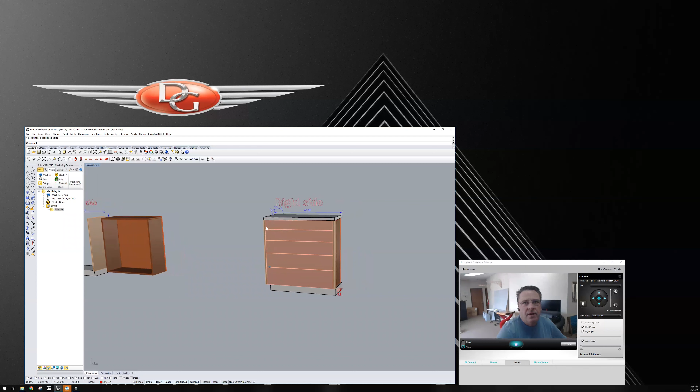Hey guys, so what we're going to do in this video is we're going to show the process of what we're doing to generate components for tool pathing to cut on the CNC.

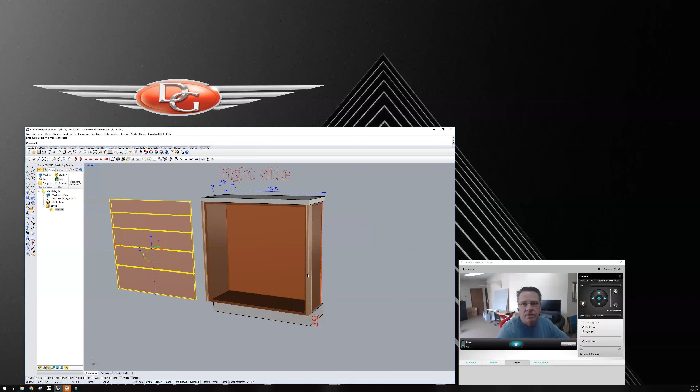So here you can see a simple cabinet. We've got drawer fronts. We've got a filler here because this lands against a wall, so that's just a 3/4 inch filler for scribe. Then over here on this side we have a panel end. There's the carcass, toe kick area, and the countertop.

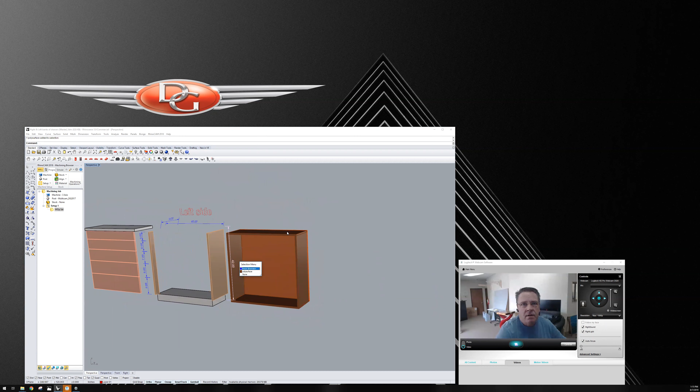And in this application we actually have two cabinets, a right and a left. And the left side I've already exploded, so we have the carcass, we have the back, sides, top and bottom. Because this is going to get a bank of drawers, we're not going to put any shelf pinholes in this. It's just going to be an open carcass.

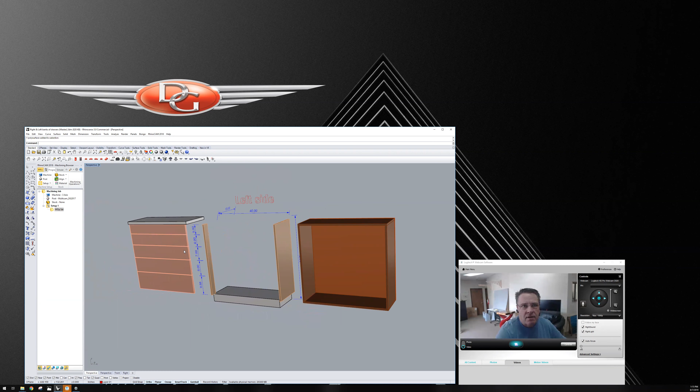We didn't draw the drawer boxes in there, but we will take this inside dimension, subtract our 5/8, 5/16 each side for our drawer boxes, and this is the size of our drawer fronts: 5, 6, 7, 8, and 9 and 7/8. So we'll make the drawer boxes for those appropriate. And so there's our exploded cabinet, there's the cabinet put together, so we're going to have two of these guys.

What we've done is we've taken all of the components. So we have top, bottom, and the sides for these two cabinets, and then these two lighter brown, these are the backs. So we've arrayed those out onto four sheets. We're also going to cut, you can see these long strips here. These are the toe kicks. So we'll pre-cut those so that we don't have to rip those on the table saw because we've got the room in those sheets. So what we want to do is we want to go to our top view here.

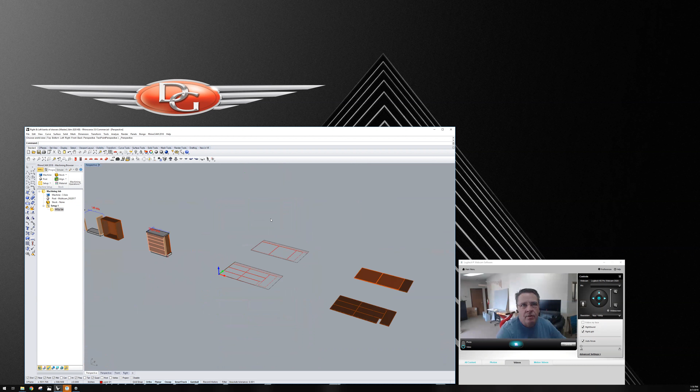So now, and this is something I'll bring up every once in a while, we're going to talk about what is called the C-plane, construction plane. And you can see this, the blue, the green, and the red. This is the XYZ home. So typically, when we do our 4x8 sheets, this is 96 inches by 48. So this is our home one on the CNC.

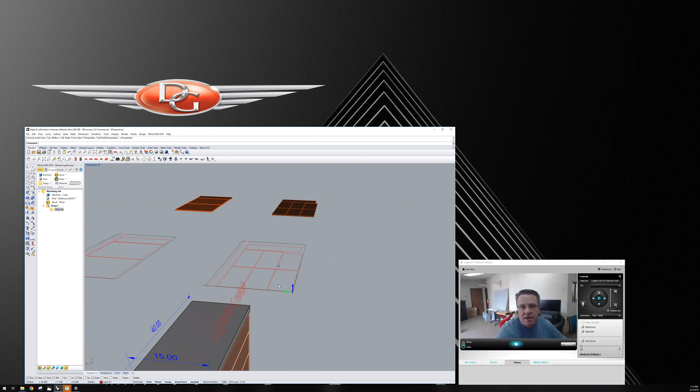So as we walk over to the CNC where we started up, this area here, this is where the controller is. So our table's actually 5 feet wide by 10 feet long, obviously bigger than a 4x8 sheet. So these are the parts arrayed out in a 4x8 sheet. And what we want to do is, when we're drawing stuff, these guys could be above the C-plane. See how they're up like that?

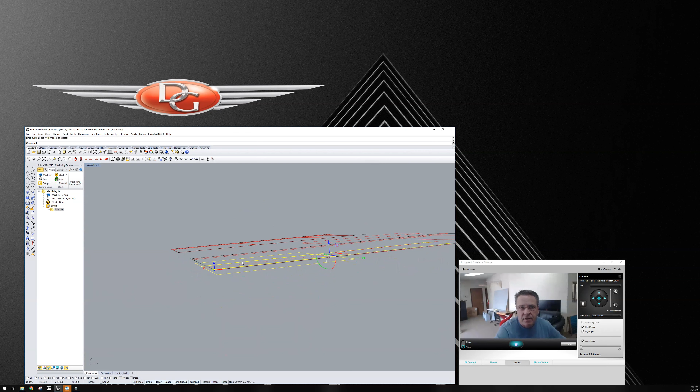And if you were to tool path this, it would cut these parts above the C-plane. And the C-plane is when we set our surface off the top of the plywood. We set our surfacing block on there, and we tell the machine where the top of the plywood is. Well, it's going to set that surface, but then if we're doing tool pathing with the parts up here, or even worse, if these guys were down there below the C-plane, the machine is going to cut to this level.

So when we array out all of our parts, let's go back to top-down view. Those parts that I had highlighted, those are below the C-plane. So if we go back to the top view, we want to give a command up here in the command button. We want to go project. So you see here, project to C-plane. So we hit project to C-plane, select objects. So I'm going to select all of these guys, because those are all of my curves. And then I hit enter.

And you see that the choice here, it gives me delete input objects. So if I hit no, it's going to keep those guys that were below, but then it's also going to project those to the C-plane. I don't want to do that. I want to have everything just projected to the C-plane, and then anything that wasn't at the C-plane, I want to throw it away. So hit yes.

So now when I go back, go back to the perspective view, you can see everything is back there. If I hit the back button here, you can see there they are. That was before the command. If I hit the redo button, it puts it back at the C-plane. So everything's at the C-plane height here.

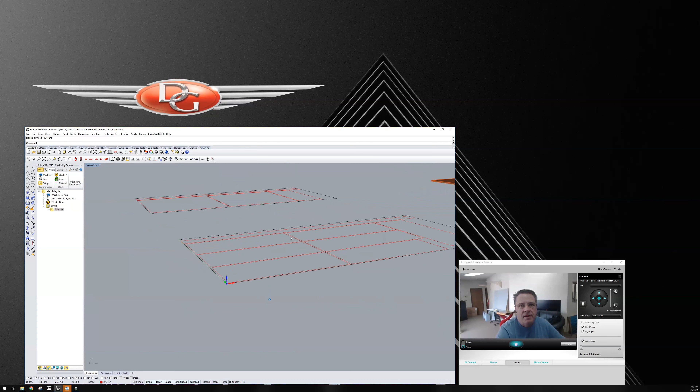So this is our first sheet right here. These are components that we're going to cut for those cabinets. And this is something else I want to show you real quick. These lines are the perimeter of these sheets over here. The way that we do that is we go to the side view here and see these guys. There's the lighter brown and the dark brown.

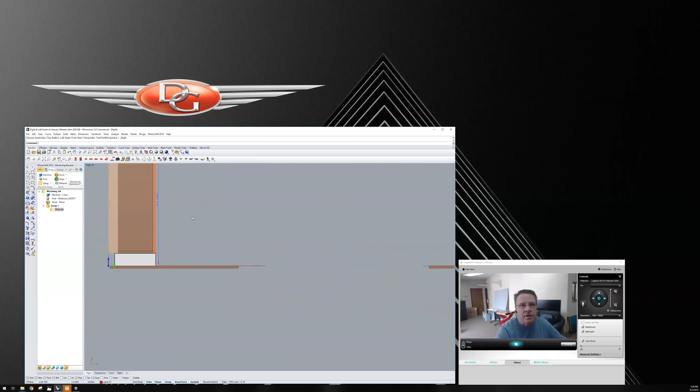So let's go to a view where you can see both of those guys. Well, you can kind of see them through the other direction. See here, that's the large back that's back behind there. But these are the pieces laid out nice and flat. And so what I want to show is the way that we generate this.

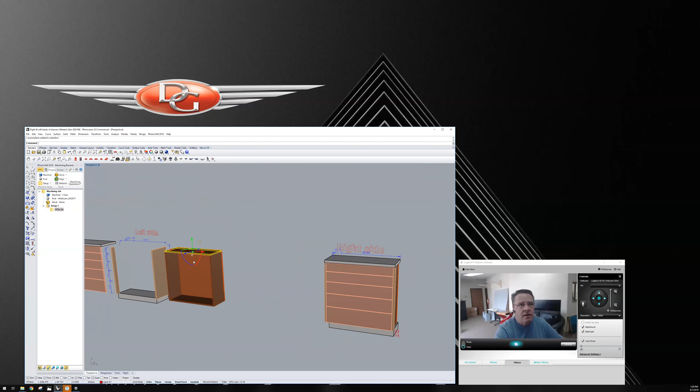So when we bring in our models, let's take a look at this again. We have all of these components over here: top, back, bottom, right, left. We've taken all those for these two cabinets, copied them, brought them over here, and laid them flat. They were all at different heights, but I brought them down so they're all at the same level.

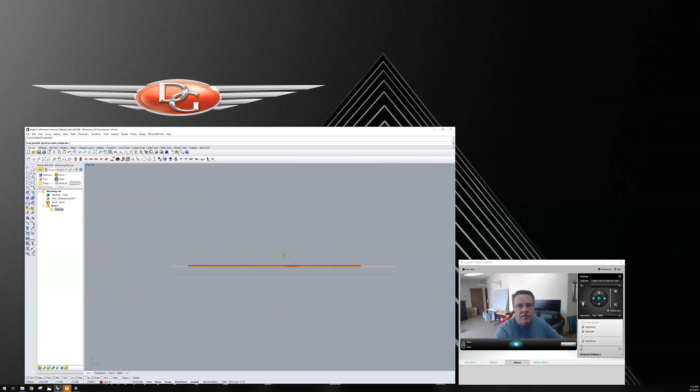And then what I'm going to do here is draw a line. So go up here to the polyline, left click, and I'm just going to draw a line across here. And I'm going to take this line and bring it up so that it's intersecting, going through all of those parts. And turn that off.

So now, see this icon over here, it says Project Curves. I'm going to left click on that, and it asks me to select curves or points to project. So I'm going to drag across that. If I drag from the right side to the left, anything that my square touches is going to highlight. Let me undo that. Let's go back to that command.

So I'm going to go back to Project Curves, and it's asking me to select curves and points to project. If I drag this box from this side, I haven't highlighted the whole thing, so it's not going to select it. But if I come from the right to the left, anything that touches it is going to highlight. This curve is going to be projected through all of those parts. Press enter when done. So hit enter.

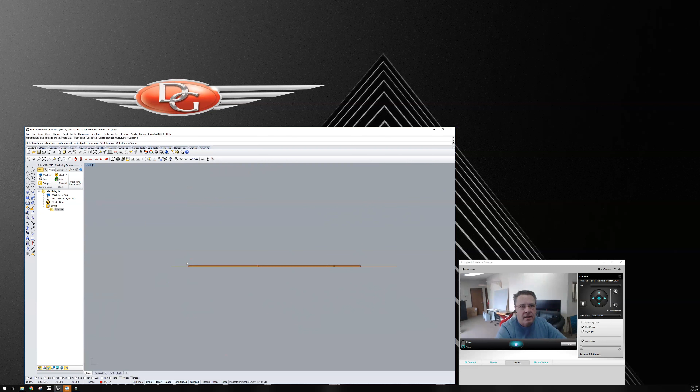Oops, let's do that again. Select curves to project, hit enter, and now it's asking me to select surfaces, polysurfaces and meshes to project onto. So I can just box over all of that stuff, and it highlights everything. Then I hit enter again, and let's look in perspective. Everything that line goes through, the perimeter of all of those parts is now highlighted.

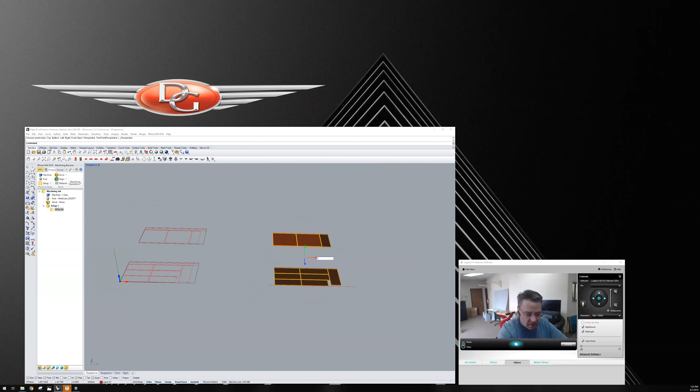So just to show you, I'm going to move it negative 100. These are the same components that I put over in this spot here, because I just did that prior. So we don't need these, we already have them. But that's how we do that.

Let me delete that. That's how we get the perimeter of all of these parts: we use Project Curves, project the line through all of those parts, and then move those over. I actually arrayed these out so they fit onto 4x8s as solid pieces before I did this. But you can also take the curves and just array those out in the 4x8 sheet.

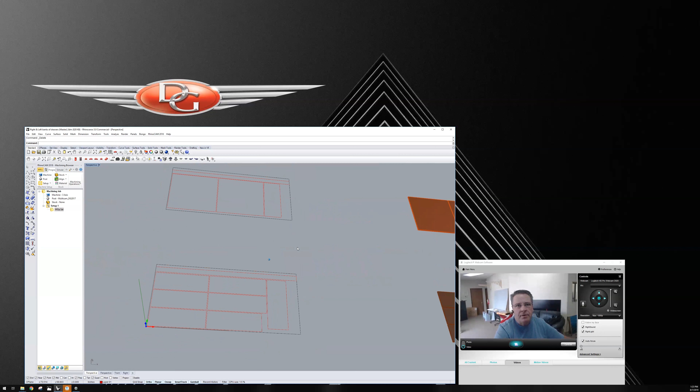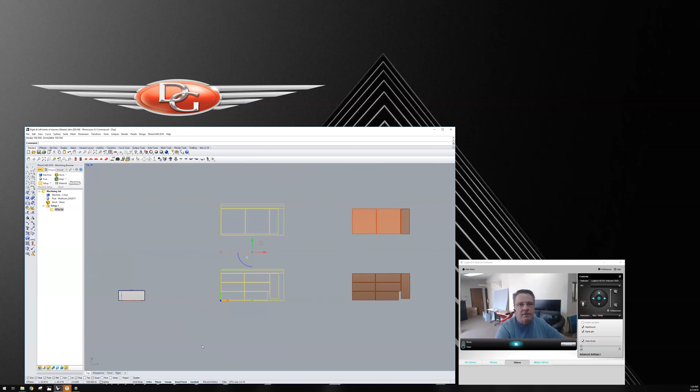So now what I want to do is this sheet here. What I typically do is I move stuff in increments of 100 inches. So these guys here, if I hover over those, I have my quick buttons set up where the up arrow, down arrow, right and left move in 100-inch increments. So if I just hit the up arrow, it moved everything 100 inches up. Come back down, so my part is in that same spot.

So now these are the perimeters of the parts that I want to cut. So what I'm going to do here is go up to machine operations, and I'm going to go to create machining operations. So it's a MOPS. Actually, I already had one going there, so let me cut that and get rid of that. So I have a method of operation set. So go back up here and hit 2.5 axis. Click on that. So these are my choices.

Typically, we're going to do profiling passes and engraving, but for right now, we're going to do a profiling pass. You can see by the icon, the black line is the part that you want to cut, and the blue line is the tool path. That's important because we want to make sure that the tool path isn't on the wrong side. So we want to profile, hit the profile button.

And so what happens here is there's a series of commands. Basically, we're telling the CNC everything to do. We're telling it what parts to cut, what bit to use, what feed rate, what RPMs, all that kind of stuff. Very important information because the CNC is only going to do what you tell it to do. So the first thing I want to do is remove all. We're generating the regions that we want to cut. So remove all and select curves and edges.

So now, like I said before, if I drag a box from the right side to the left, anything that my box hits, even just a little corner, it's going to highlight. If I come from this side and go like this, it's only going to grab the things that are inside of the box. I'm going to hit escape. If I escape out, I've got to go back and tell it. So 2.5 axis, profiling, remove all and select curve edges.

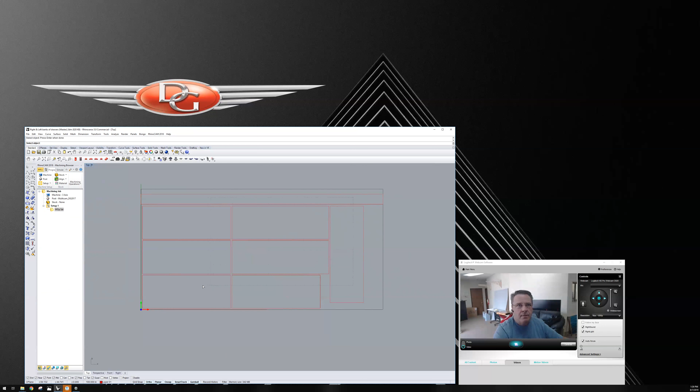So now if I start up here and I touch some part of all of these boxes, it's highlighted all of those. I did that with my left mouse. So now if I right mouse, it's going to indicate all of those parts, and you can see that there's a starting point. This little icon here is where it's going to start that region. So I have all 8 of my regions. So that's my first thing, control geometry.

So the next thing we're going to want to do is pick our tool. So we click on the tool button. We have no tools loaded yet, so we double click on this, and that's going to bring up this window. So we have ball mills, we have end mills. These are where we identify our tools, and we actually already have one loaded. But I'm going to go ahead and do a different tool here. I'm going to click on flat mill.

And so now we always name the tool. Typically what we'll do is name the diameter. So I'm going to go 0.25 end mill, and then capital T.

Our 1/4-inch end mills are always in tool number 5, so I'll name it number 5. Tool diameter, I want to make sure, because this is really important. They're all really important, but this one's really important that you get put in there, because if it says 0.375, 3/8, but you meant to put in a 1/4-inch bit, it's not going to cut the part where you want it to. So we got to make sure we have the correct diameter. So that's a 0.25. That's the name of the tool, 0.25 end mill, T5.

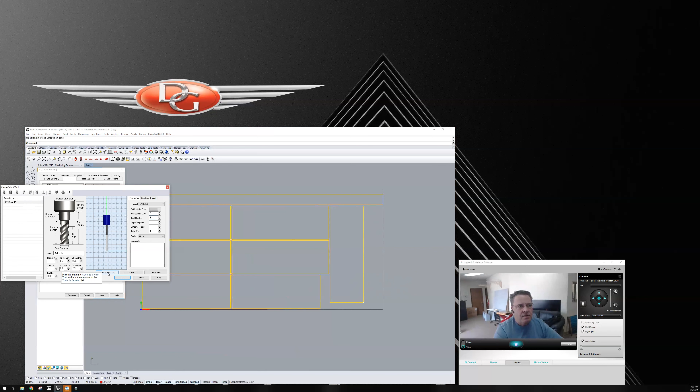Because we only have a 3/8 compression in there right now, we're going to save this as a new tool and hit OK. So now we go to our next button. We started at control geometry, we went to tool, now we go to feeds and speeds.

Here we've got, it always defaults to these numbers. These are things that if you have any questions, ask us. There's some defaults that we have just from running things so much. Typically on our 1/4 inch and our 3/8, if the bits are sharp, I'm going to default to...

About 17,500 RPMs. These guys here, this is the plunge. So this is the plunge feed, that's this portion of the entry. The approach feed, which is the next one, that's where it's starting to enter the tool path. And then the engage is the actual engaging of the part.

I typically default to these guys: 75, 75, 75. The cut feed, this is how fast the bit is going to be traveling.

When we're cutting 3/4 inch material, depending on how thick you're going through, if we're going through MDF, we're probably going to be going at a little different speed than if we were doing plywood, or definitely a different speed than if we were doing plastic or something like that. But on the cut feeds for plywood, which we're cutting in this application, I'm going to default to about 175 to 200 inches a minute. So let's just go ahead and go 175.

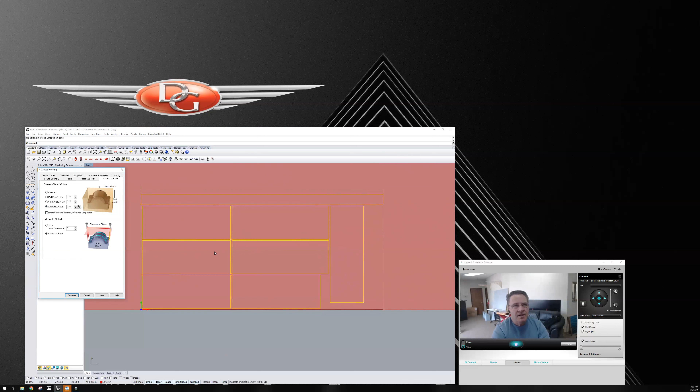There are times where we'll have different thicknesses of material down, and we want to make sure that if this piece over here was thicker than these guys here, and the machine's coming down from over here, you would want to set your clearance plane at the height of this highest part, so that as the bit's coming across, it doesn't run into this one trying to get to this guy. All right, so everything's on the same plane here, so we're just going to go 0.25, so 1/4 inch over the top of all the parts.

All right, so we're going to go to our next button, clearance plane, and then we go up to our next guy here, which is cut parameters. So this guy here, because we're cutting straight lines, this tolerance level here is not really going to be affected. It defaults to this 0.001.

If we're doing curves, a lot of times what I'll do is I'll put an extra 0 in there, because when you're doing a curve, it's a series of straight lines to create that curve. And if you're at 0.01 or 0.001, if you zoom way in, you'll see a bunch of straight lines. And if you're cutting something like a piece of plastic or something that's really fine and dense, you'll actually see the little bumps in the cut.

So what we want to do is make sure that the tolerance is appropriate. So here we're at 0.001. That's fine, because like I said, we're cutting straight lines, so there's not going to be any issues with that.

This is a really important aspect right here, the cut direction. So if you've ever run a router bit, you know when you do a climb cut, it gives you a different attitude of cutting. When we're cutting plywood and MDF and melamine and things like that, I'm going to typically go to conventional cut. If you go mixed, the computer is going to go both directions. When I'm cutting parts with a nice brand new bit, I'm going to get a really good cut from conventional cut. So click on conventional cut.

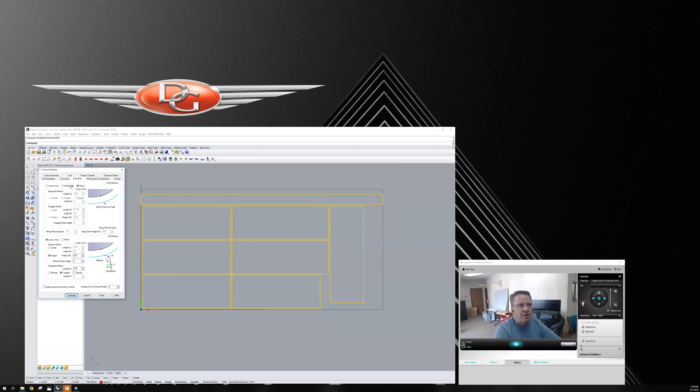And then the same thing with its exit from the part, or retract, is it defaults to where it's going to exit the part like this. And I'll show you this, it's something good to identify. So let's go back and just do a toolpath with that. I'm going to click on that guy there. So you have an entry and an exit. We've identified everything else, so now let's just go ahead and hit generate. And you can see here how this is the entry and the exit as it's cutting the part.

So over here, it's not a big deal because it's going to enter and exit in this waste material. But over here, because the entry and the exit are beyond this blue line here, this blue line represents the center of the bit where it's cutting. It's actually going to make a little notch in the part because this yellow line is the finished part. The blue line is the center of the bit. You've crossed over that with this bit, so now you're going to make an indentation in that part, which we don't want to do. You can see on all these guys, it's going to do that.

These are deeper because all of my parts always default - we've got a 3/8 compression bit, so all of my parts are 1/2 inch away from each other. So one bit's going to come through, but it's not going to touch the other guy.

And then when it comes through, they'll be close, but you're not going to be interfering with the other guy. So this is really important to pick out, because you don't want to ruin this piece in cutting this piece. And same thing here, you would ruin this piece by cutting this piece.

So let's go back here, hit that plus arrow. So now here's all your controls again. As we went through the control geometry, we went through identifying what tool you're using, what the diameters are, the feeds and speeds, clearance. These are all the tabs that were across the top. So I want to go back to parameters. So I'm going to click on parameters. And so here's my tolerances that we went through.

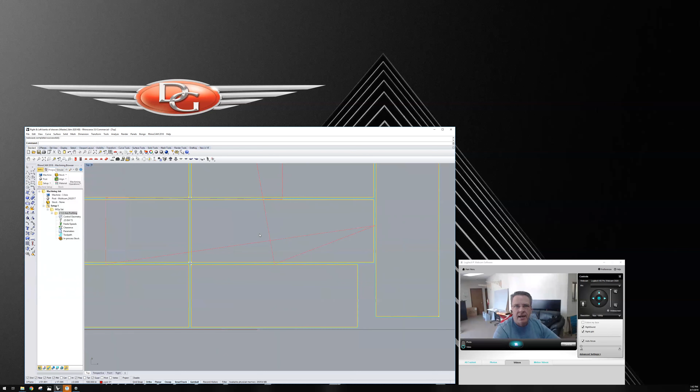So now if I go back to none and none, and then generate again, watch what happens to those guys there. They go away. So the bit comes over. That's what this red line represents, is the fast motion to the next cut. So it comes over, does its operation, goes around, comes back, jumps over to this guy, does its operation, goes back over. So this red line represents the rapid motion from cut to cut, and the light blue line represents where the bit is traveling.

So a lot of times it's really important to check, especially when you're doing little pieces that are next to each other, a lot of times the bit doesn't know, or the computer doesn't know what side of a part you want to cut. So say, I'm going to do something here.

So say you have a cut, say you've programmed all this, and you look through these. Okay, so here's the part that I want. The blue line's on the correct side. This guy's on the outside, so it's giving me the finished part that I want. The yellow line is your finished part. But then you look at this guy and you go, wait a second, this one's on the wrong side. And the computer doesn't know what side you want.

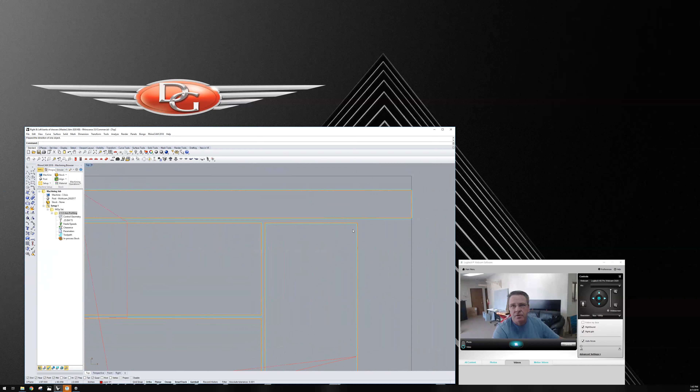Once you get into these, or it's a large part, it usually guesses pretty good, but you got to go through and check, or you're going to waste a piece of material, because this guy is now going to be 3/8 of an inch or 3/4 of an inch smaller than it should be because you cut on the wrong side of the line.

So here, what we want to do is check this guy. As we go through these, we see, okay, all these are good. The light blue lines on the outside of the part. So we highlight this guy, and then we just type in flip, F-L-I-P. And you see how there's the command I just put in, flip, and you hit enter.

Flip, enter. And then I hit regenerate. Let's try it again. Flip, enter. So see how it was cleared. This red means that there's an error. So because I've changed something, now I right click on this guy on the top part here and I say regenerate, and now this guy goes back to the correct side.

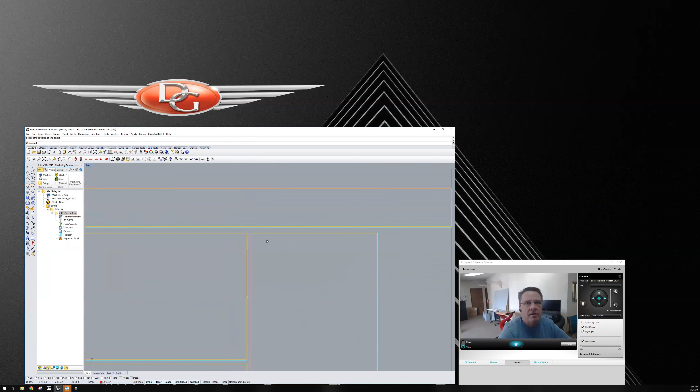So you definitely want to make sure that as you go through your components, you check to make sure that light blue line is on the correct side of your part. So that's really huge. So from there, we know this is our first part.

So what we're going to do is right click on that, and you can see this part that says post. I'm doing this video on a machine that has a temporary license, so we won't actually be able to post off of this. But I would click on post, and I'd have a thumb drive in our USB deal here, and this post here says cannot post while running in demo mode. But I would post that to the thumb drive, and then I would take this tool path out to the machine and then load that on.

So that's kind of a long version of the video, but this is a good one for the basics of cutting these parts on our CNCs.